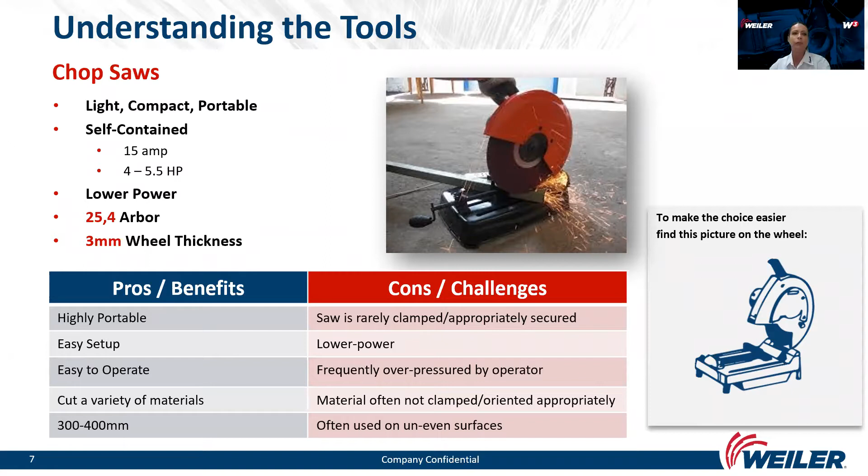Moving on to stationary machines, which are much bigger and bulkier pieces of equipment. They demand their own space in the shop, but they are very stable and less portable of course. Motors are at least twice as powerful as chop saws, and they are more suitable for cutting larger profiles. An operator will almost never overpower this type of saw, but appropriate clamping here is much more important because of the heavier power.

Wheels for these machines are made with heavier reinforcement to manage the additional power from the saw, because this machine will not stop if the operator applies too much pressure. That's why these wheels are also noticeably thicker than chop saw wheels. As always, you should check the maximum RPMs on the wheels first before starting work. If you see this pictogram on the wheel, it's only suitable for automatically guided stationary machines, even though the RPMs fit. If the wheel does not have this pictogram, it can also be used on manually guided stationary machines.

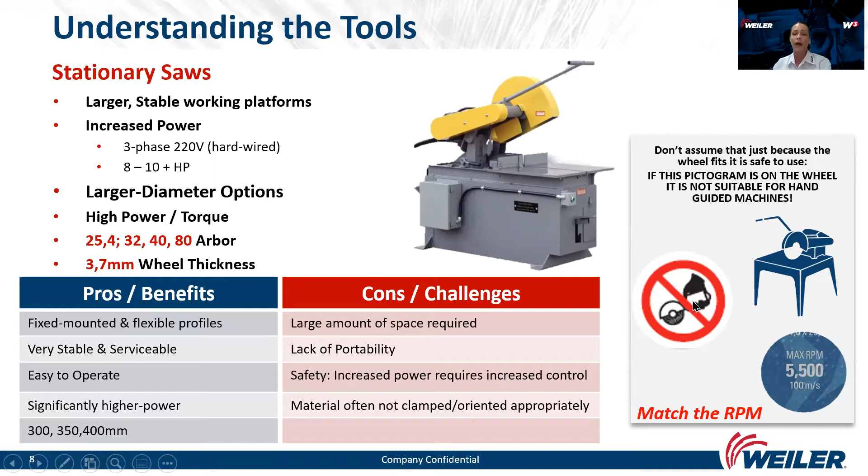Moving on, gas saws are also highly mobile and very powerful machines. They require regular maintenance and need a little more time to start. They are very noisy and bulky and heavy, but again, very useful for cutting various materials such as concrete, steel, and asphalt, among others. They are built to last, and actually the only big machine where you take the tool to the workpiece, not workpiece to the tool.

But we've seen a lot of confusion on the market regarding this machine. Because even though the wheel fits under the guard and on the arbor and the RPMs match, it doesn't necessarily mean it's the correct choice, due to the side load, and it's not safe to use on the gas saw. Wheels for this machine are extra reinforced to manage the side pressure, because this is a handheld machine. And if the wheel has the pictogram from the previous slide, it's definitely not suitable for a handheld machine.

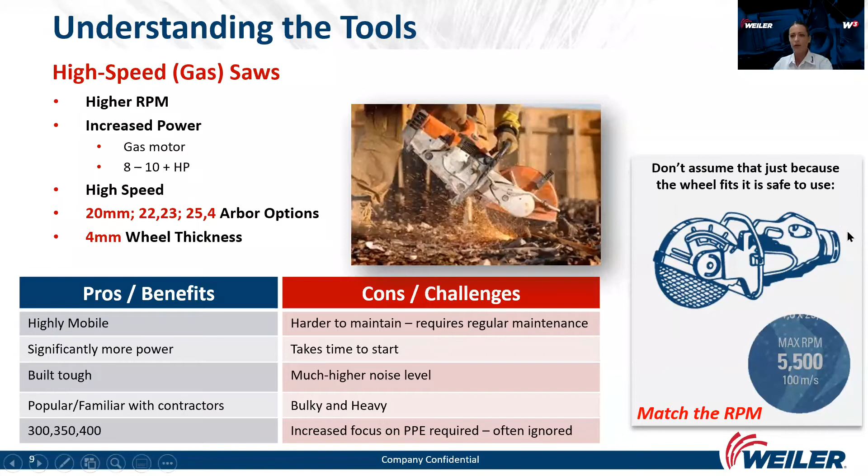To avoid the confusion, we decided to add an extra image of the machine, this one here, on our Metalynx products.

So now we discussed the tools, and now we will go through the product portfolio. The first thing we need to know is, of course, the machine type. And sure, we need to also know the power, the speed, the guard dimensions, and the arbor, so we can avoid excessive duration of cutting and excessive wheel consumption due to low power machines or insufficient RPMs. The next thing we need to know is the material.

Is it steel or stainless steel? The wheels need to be contaminant free. We also offer special qualities for cutting stone and cast iron. They are both made with some silicon carbide, but they are very different, so as to perform the best on both materials. One of the toughest challenges is also cutting rails, because they are made of a hard mass of steel, and that's why a special wheel is needed.

It's important to consider the dimensions of the workpiece also, so you can determine the correct hardness, and we will talk a little about that later.

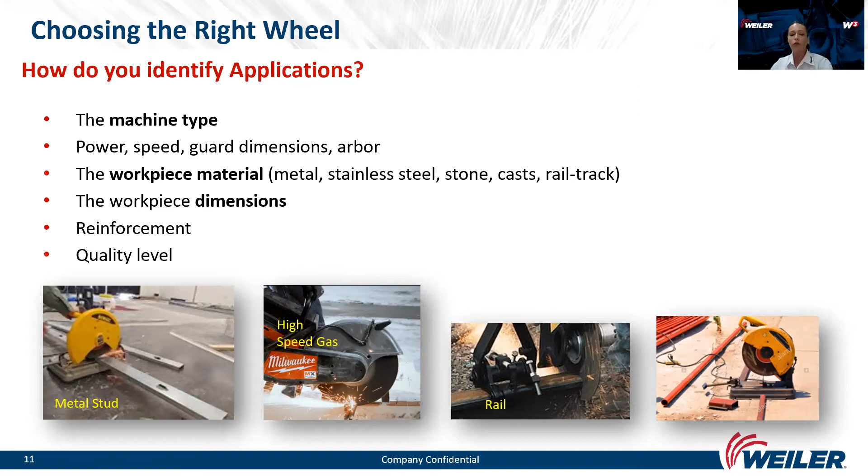First, we will focus on quality levels. To cover different needs on the field, Weiler is offering two quality tiers for end users: the Pro tier and the Max tier. Our Pro Performance line delivers the best price-performance ratio and offers long-life solutions for all general purpose applications. Our Max line is the best solution for the toughest jobs. It provides maximal productivity with outstanding product life.

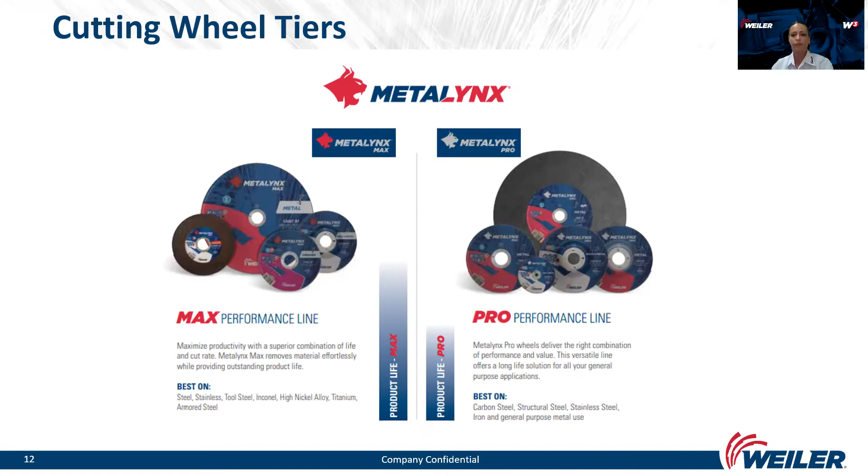Moving on, here I will show you only part of our assortment for chop saws. In the first column, we can see the diameters from 300 to 400 millimeters with the 25.4 arbor hole, and the thickness is on average 3 millimeters due to low power motors on chop saw machines. The second column will tell us which material the wheels should be used for. Then we have the column with maximum RPMs, and also standard packing and ID numbers. You can see the quality line here in these little red headlines.

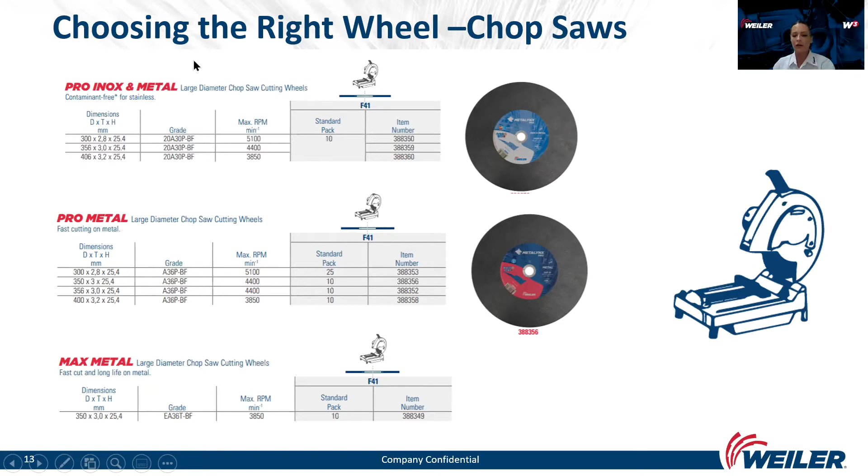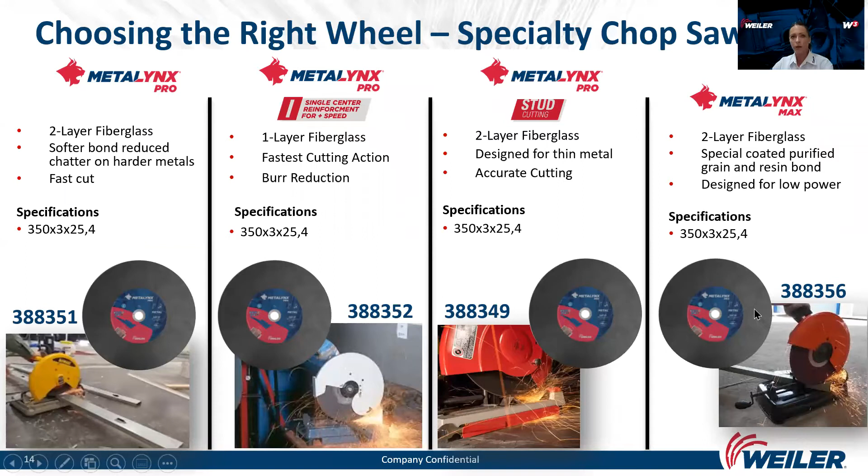If we dig a little deeper, for instance in the 350 millimeter chop saw, we have multiple options. Moving from left to right, the first item is a two-layer fiberglass Pro cutting wheel. This one has a soft bond for harder materials and provides a fast cut and good life. The second one is a single-layer fiberglass reinforced wheel for the fastest cut and burr reduction. The third item here is designed for cutting thin material and for a very accurate cut, especially for cutting studs. It is also two-layer fiberglass, as is the last one here, which is a Max line product made with coated grains for the longest life.

For high-speed gas saws, we produced extra reinforced products from diameter 300 to 400 millimeters with bore holes 20, 22.23, and also 25.4. They are thicker than chop saw wheels, but they also differ from the wheels for stationary machines due to extra reinforcement. We produce two thicknesses for two different hardnesses for the metal. The softer version is marked with S, and it's better for really thick materials. The harder one is marked with P, and this one will get us amazing results with no dusting and extraordinary life.

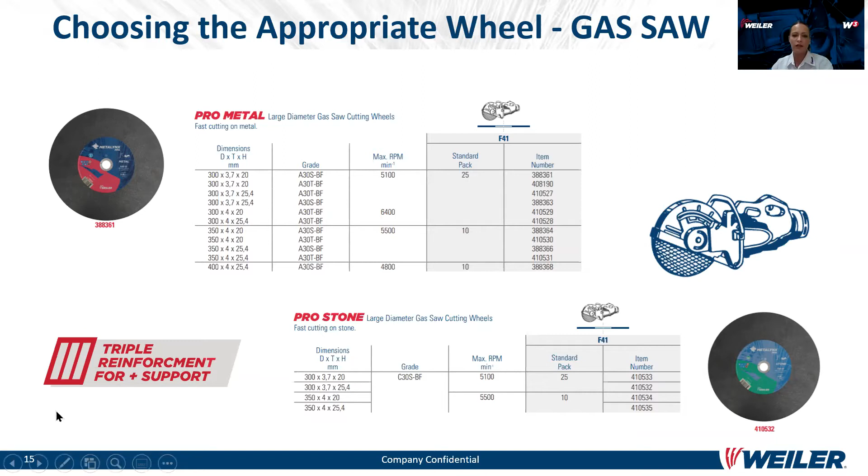If the wheel is too soft for your application, for instance, it will wear out too quickly. But if it's too hard, you will see some glazing, and it will be hard to resist the urge to not push too hard. We also offer cutting discs for stone, for gas saws, and also cutting discs for cutting rails. We covered the details in one of our previous webinars, so you are welcome to find it on our webpage, just in case you missed it.

So back to cutting rails, we are producing two quality lines here as well, Pro and Max line. Max line is made with zirconia grains for the longest life and the fastest cut. And the Pro line offers the best price-performance ratio, and it was designed to cause no bluing and no dusting.

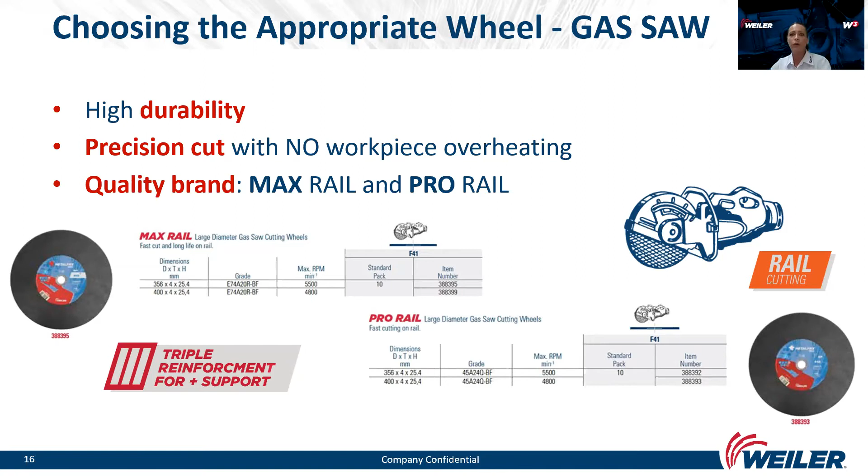For stationary machines, we also have multiple options. Wheels are also produced from diameter 300 to 400 millimeters with bore holes 25-4, 32, 40, and also 80. These products can be reinforced with two outside reinforcements, or one inside and one outside reinforcement, depending on the diameter and maximum RPMs. We offer this product for steel and stainless steel, and also cast and stone.

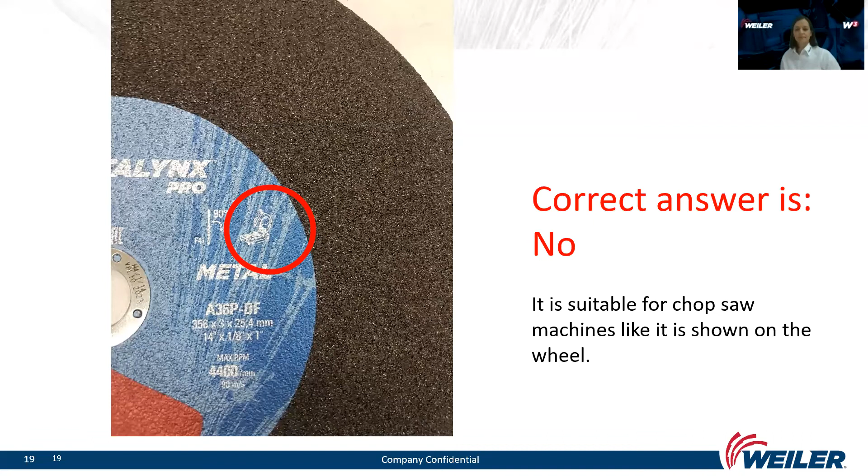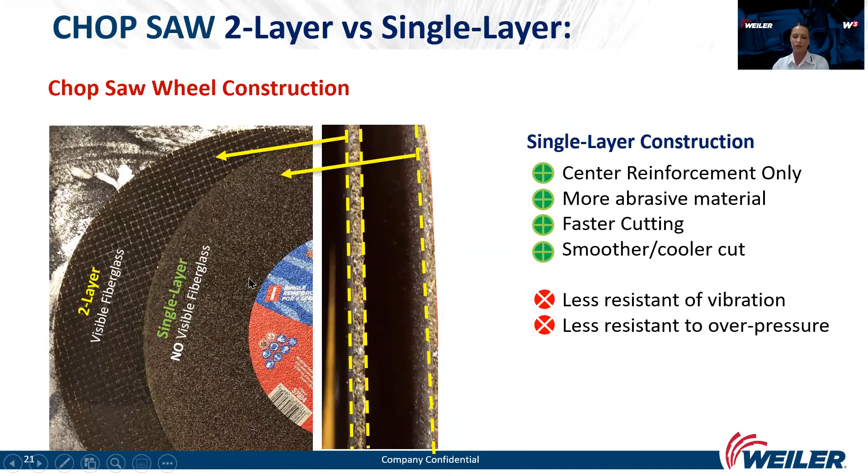This can cause the operator to push too hard, which can slow down the motor. And like we said at the beginning of this webinar, cutting wheels for chop saws are the thinnest. You can actually cut with a thicker wheel, but it's not very efficient. It is safe, but not the other way around. Do not use wheels meant for chop saws on stationary or petrol machines. Just remember the pictograms.

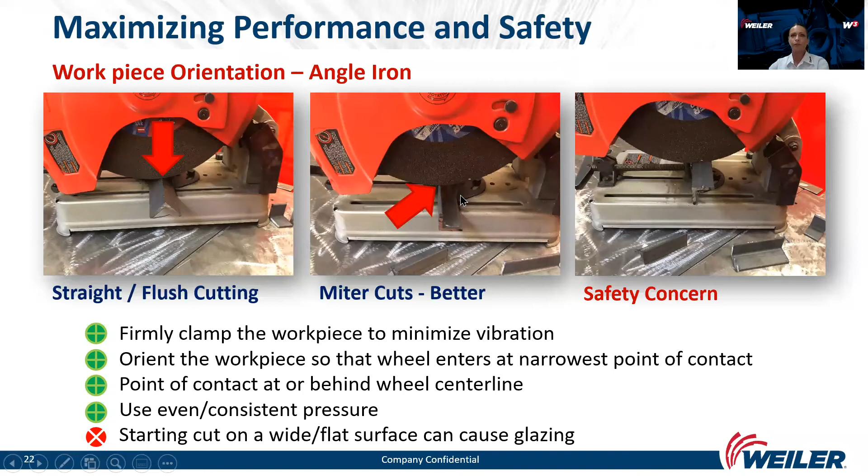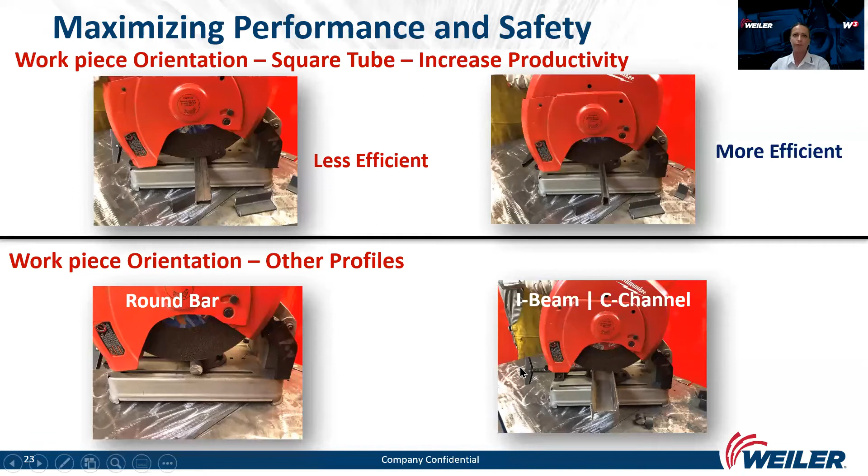So now just to wrap up, like always, safety is first. Be careful to choose the right wheel for your tool and application, and remember to properly clamp it, but not over tighten. Secure the saw and the workpiece to minimize vibration. Remember also these tips to increase your productivity: pushing harder will not cause the wheel to cut faster. That's why you shouldn't use thick wheels on a chop saw. Enter the workpiece at the thinnest point and let the wheel do the work.